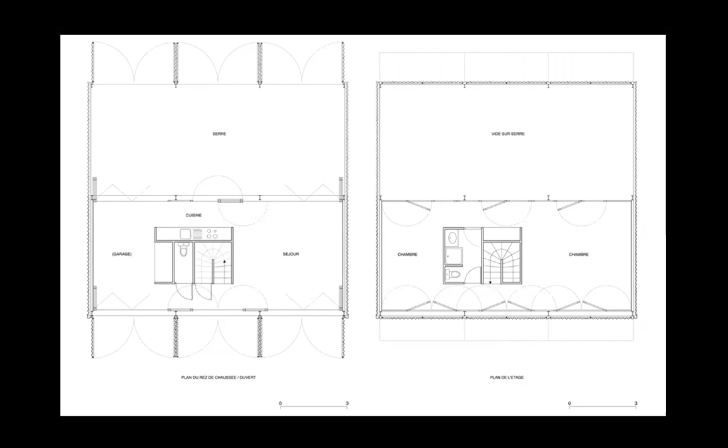In my opinion, and I'm not a functionalist, this is not a house that is very modest, and it's not a house that actually functions very well, in my opinion. Even if I'm sure in France artificial or mechanical ventilation can be provided in decent conditions, but still, anyway, these are some thoughts I had about this house.

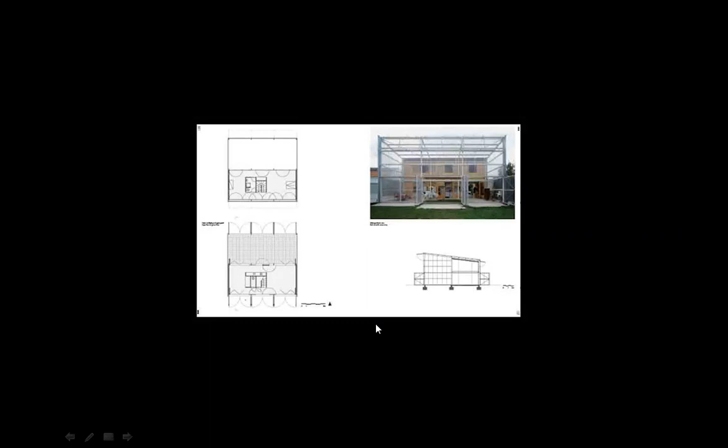Which appears to be modest, but is not actually, because if you look even at this picture on the right corner, that greenhouse is quite rhetorical, quite big. Imagine removing it - then the facade of the building would be here, and the relationship with the exterior would be more natural and, I would say, more beneficial.

On the other hand, if I look at these facades, there is something that I like here - it's almost a lyrical strictness, if I am to use such words. It's modular, and it makes me think a little bit of Japanese architecture. It has qualities, but I don't know.

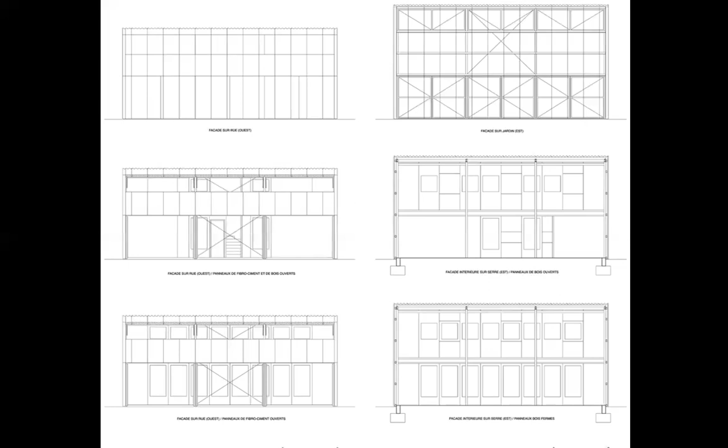Maybe it's necessary to have a direct experience of the place, to live there, and to understand how it is to actually have half of the surface of the house dedicated to being a greenhouse. These X's still bother me, because I'm not sure they are really needed structurally. I think they should be avoided. But this is my opinion.

I'm subjective perhaps, but this X, this crossing - we know very well the symbolism of this X. You cross something out, it means interdiction. That's what it means. And there are plenty of them in this house, but the most bothering one is here.

When I look at this image, I have the clear feeling that this is a cage. And if I am to live in it, it's like I'm a bird in a cage, trapped. To me, this is not freedom. I mean, yes, the doors are widely open, but the X is telling me stay away.

Even though, of course, factually I could go through it, with a little bit of effort. Anyway, thankfully, there is the paraphernalia of what the people who live there have. Things, objects, clothes, and so on, which give life to what otherwise is almost a lifeless architecture. I am tempted to think, like, for example, there is a novel by Musil, A Man Without Qualities.

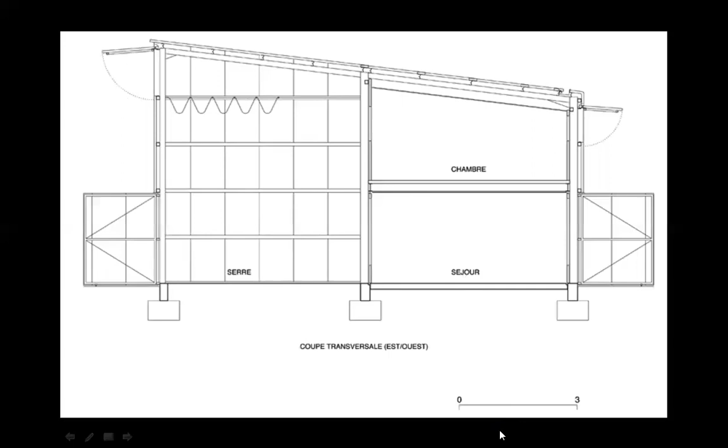I don't know. When I look at this section, of course, a lot of the activities of the living room take place in the greenhouse. It's just that I'm not sure that without air conditioning, or without keeping these doors continuously open, I still think it could be suffocating. But it's true, I'm not a plant. I never lived in a greenhouse.

Now, it's not difficult to imagine without some kind of air conditioning, I think you'd melt down there in the summer because of that extensive glass surface. And it's true, I'm an adversary of the demagogy of glass. I think we should restrain ourselves from using so much glass. Anybody knows, including Philip Johnson, who said that having a glass house like he had increases bills dramatically, and he was very rich—he afforded big bills.

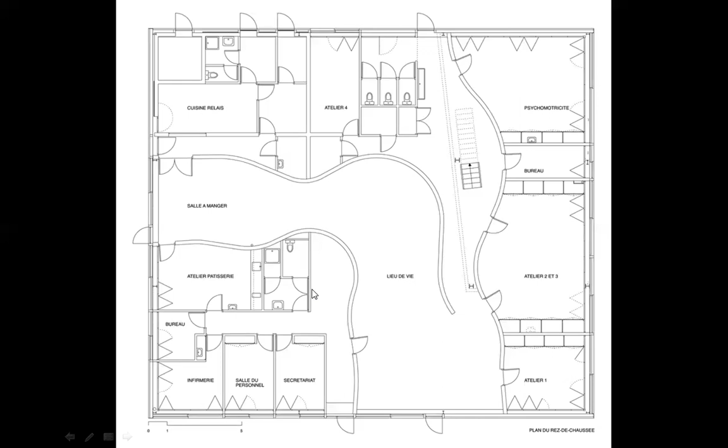So the freedom is contained, it exists to an extent, but not to a very large extent. And we can see even here the walls are very bare. I mean, they are curved, but they are blunt. Nothing happens on these walls.

I don't know, to me this is not a very interesting architecture, I confess. And it's built rather poorly—these materials, you know. That's why it's so needy to bring in some heavy oak furniture or whatever, heavy old antiques. They would add something to the building which the building doesn't have.

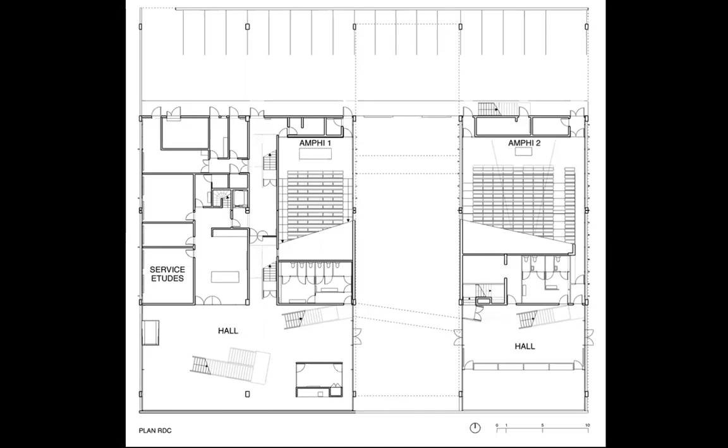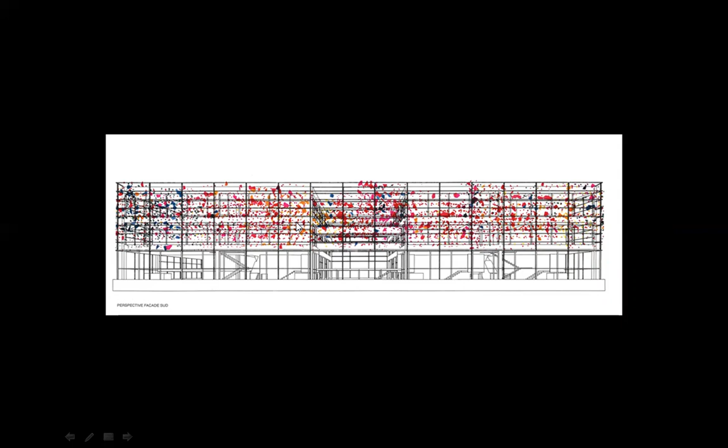It's very regular and unimaginative. And yes, the light is nice in this case, but I don't know. If you look at this building, you would see these impressionistic dots of color, which add some life to a building otherwise kind of lifeless. Maybe with the plants that would happen. But when you think that all of this is glass, and there are actually two layers of glass here, you suffocate.

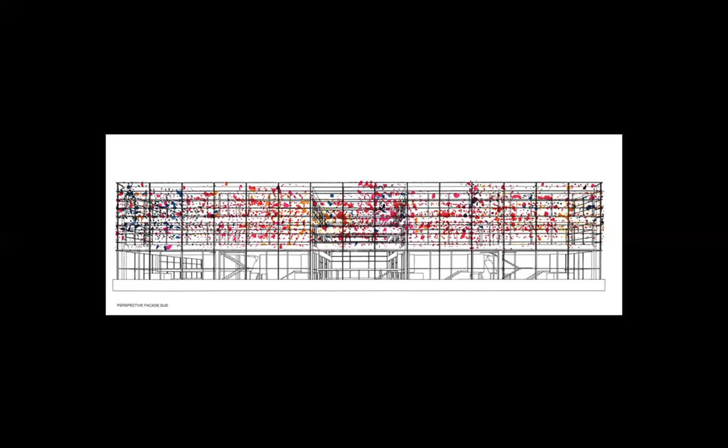That's the truth, Lacaton and Vassal, without air conditioning. And air conditioning means being against your time. When we talk about sustainability, when we talk about climate change, we talk about pollution, to rely on air conditioning is to ignore the serious realities of our time. This is what I believe. On the other hand,

I like these stairs here, how they contradict in a way the Cartesian regularity of the building. That's not bad.

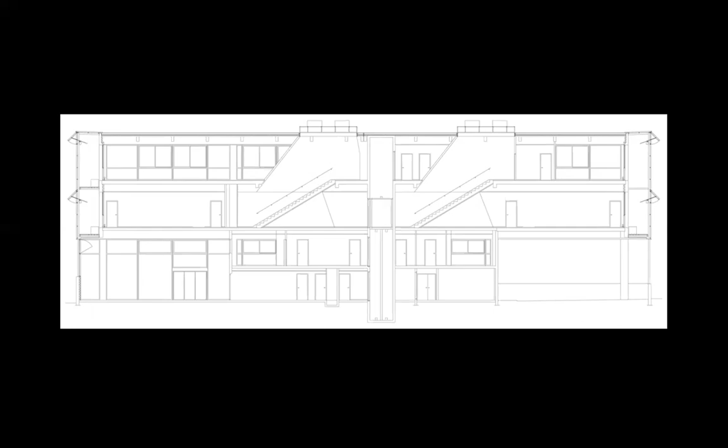But you see clearly in this section what we already discussed, that between the rooms and the outside, there is this intermediate space, which is in essence the glass house where the plants are supposed to be, squeezed in, because that's what it is, squeezed in, entrapped. Well, this is a little better because at least some tables, not everybody. I have an issue with this, I look at this poor student here. He's really losing his sight here, but anyway, let's not be a functionalist.

What bothers me the most is that, again, you cannot live in this space without air conditioning. I don't think you can. And if I was a plant myself, I wouldn't like to be trapped here. No, I wouldn't. I would rather be outside where God made me, not here, trapped between two glass walls by Lacaton and Vassal, and also covered with glass. No, I wouldn't like to be trapped like this, sorry. And if I was a bird, I would not like to be trapped in a cage either.

Maison en Dordogne, 1997. This is it. I mean, they do have qualities, it's a certain essentialism here, which I like. This also makes me think, I don't know, I think this house perhaps would have been more at home in Japan than in Dordogne.

But that's why I keep making references to Ishigami, and not only Ishigami, I like here the archetypal, schematic design. There is something that I like, but again, it's a lot of metal and a lot of grayness. Thankfully, yes, people have furniture. And why is it that people didn't buy furniture that was metallic and gray? Well, I guess because they didn't like it. That's why. It's a big house.

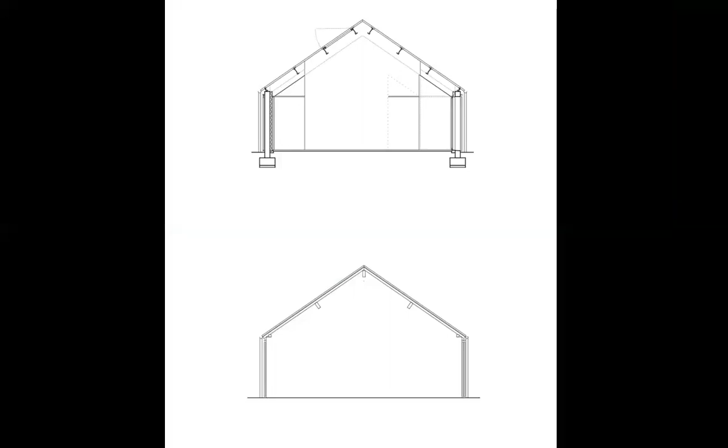It's almost like a warehouse, actually. I have seen other houses like this. This is not just theirs. Just like in the case of the first house we saw, you need an additional roofing here, in this case, an umbrella. But isn't it strange to have an umbrella within a room?

You have to, because, I mean, again, this is not modesty. I'm sorry, this is not modesty. I mean, under this glass roof, you melt down, or even if it's not glass, you melt down in the summer. And in the winter, you better have money to pay the bills for heating this space. But on the other hand, you could say this is a way to bring the outside in, because usually this kind of arrangement takes place in the patio, outside in the courtyard, but not inside the house.

This is something I like. I always liked furniture for the outdoors, but inside. In this case, that's exactly what we got, thanks to Lacaton and Vassal. Yeah. But all in all, grayness is its great majesty in their architecture. Metal, nothing but metal.

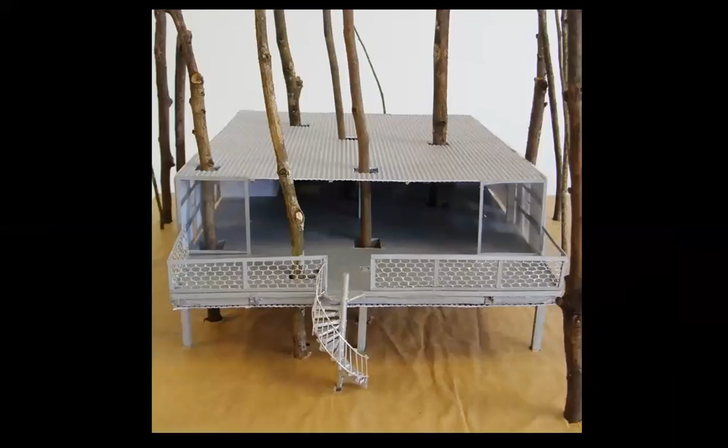I wonder if these are not, to an extent, perversions of an exhausted human being at the beginning of the 21st century or at the end of the 20th century. Look at the model. The house, again, gray, and then the trees. I am tempted to think that if I was a tree, I would not have liked to be treated in this way. No.

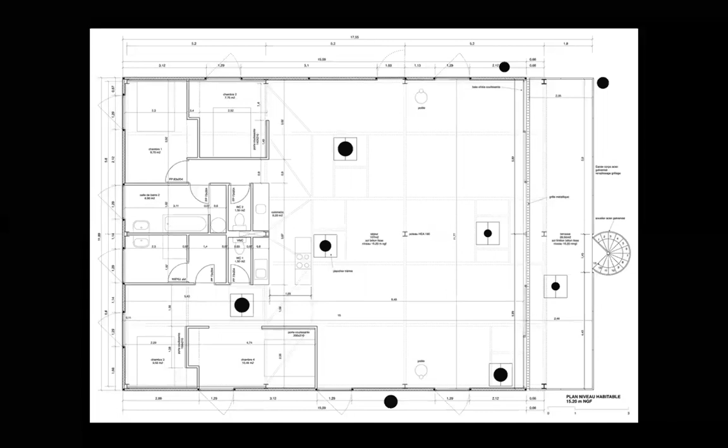Is this the way we make peace with nature? I don't think so. This tree cannot go a little bit to the left or right because it destroys the house. The house is, how do you call it, chaining the tree. The tree is not free like this.

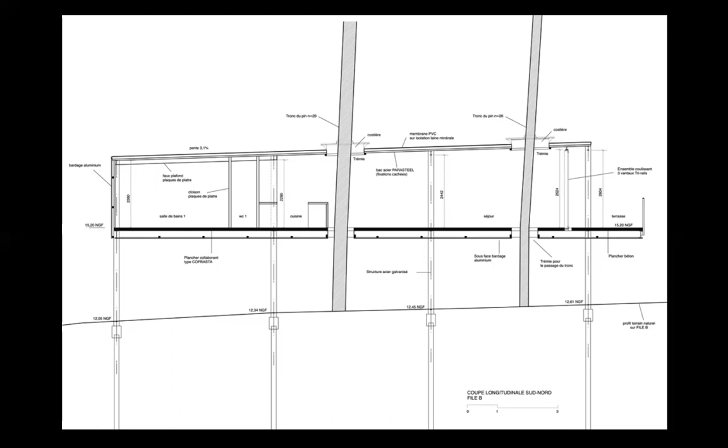In as much as the plants behind two glass walls are not free. Now, if this gives the illusion to these people that they have an intimate connection with the outdoors, that they are inside but also in the forest.

Come on, look at this poor tree here, squeezing itself through this round hole that the architect provided for it. I don't like this. The more I look at it, the more infuriated I get, because it shows lack of sensitivity towards these trees. It's using the trees for some kind of exotic, aesthetical little pleasure.

Maison à Coutras, 2000s, again. What we look at is a glass house. It's a glass house and a greenhouse. If you compare this greenhouse with the glass house that Philip Johnson built for himself, in his case I think it was more honest in a way. This is misleading because this is a greenhouse, and it's a greenhouse for human beings, not for plants.

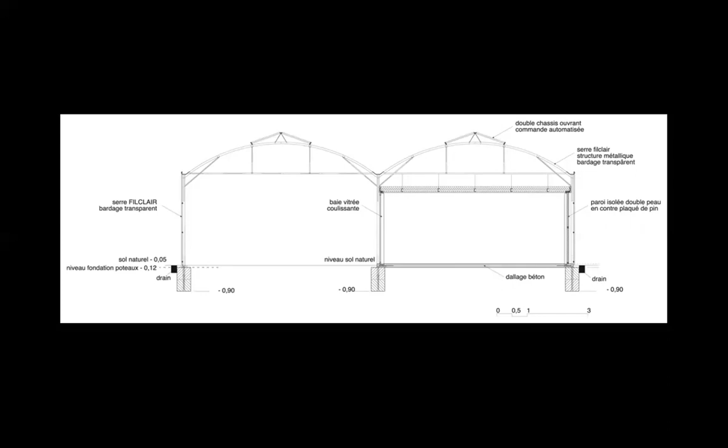At bottom, probably any serious discussion of the work of Lacaton and Vassal comes down to this: is living inside a greenhouse the way to go? When it snows, it's very cold. When it's hot, it's unbearably hot.

Just like in the first house we looked at, the arrangement of spaces here is similar. We have the rectangle of the whole house divided in two. Half of it is a serre, meaning a greenhouse, and the other half is the house per se: the living room, 2 bedrooms, a bureau or study room, kitchen and bathrooms.

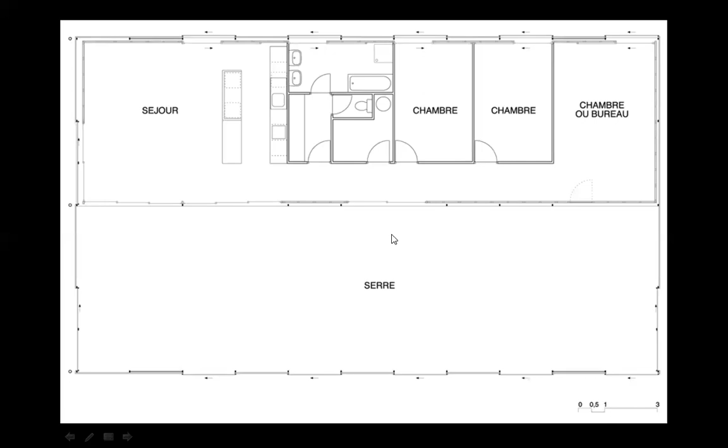I would say the functional arrangement within the house is rather prosaic. This is prosaic architecture. Besides the innovation of cutting the house in two with half dedicated to being a greenhouse, in essence it's not a very imaginative architecture at all.

But the surprise effect is that when people bring in their furniture, you get a lot of variety, especially within the greenhouse. I still wonder how it is here in the winter and how it is here in the hot summer. Yeah, in essence that's what it is, living in a greenhouse, or two greenhouses, like we see here.

Site de création contemporaine dans le Palais de Tokyo à Paris, 2001. I like this very much, I confess, but this is not what they did. This was the existing structure of the building, and I like that they stripped off the finishes. I'm a great adversary of finishes. I like raw materials, raw things, and this is raw.

For this I admire them, because here it shows unconventionality and is really in the spirit of création contemporaine, contemporary creation. Yes, it's still grayness, but here the grayness is more bearable because of the tectonics of the materials we look at. It's heavy grayness.

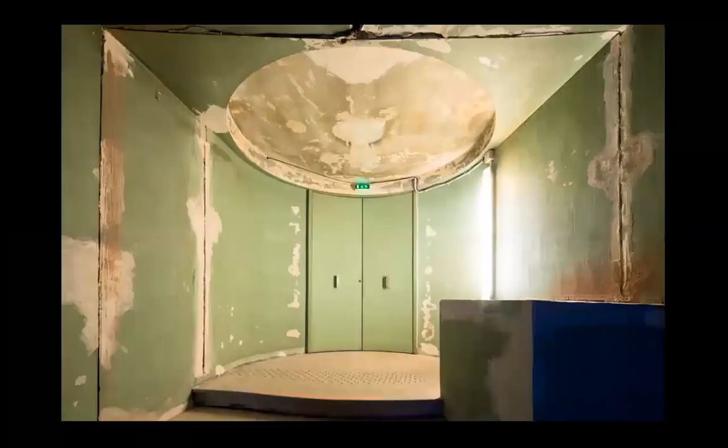This is the building in Paris. It's an important work. I don't know exactly what they did here, and I should have double checked if this building was not built by Auguste Perret. I like even this, the fact that they reject a placid finish, and that they show, in a way, almost the misery of the world.

Yeah, we could talk a little bit about this. Being a space for contemporary art manifestations, I guess it's fine. This is not the opera in Paris, Garnier it is not.

To welcome the ruin is something, I think, to be appreciated. I dislike what I see here. This interior is more spoiled, but it doesn't have really anything inciting. Now, touches of you know, Nipponia, I almost felt like saying. Interior design.

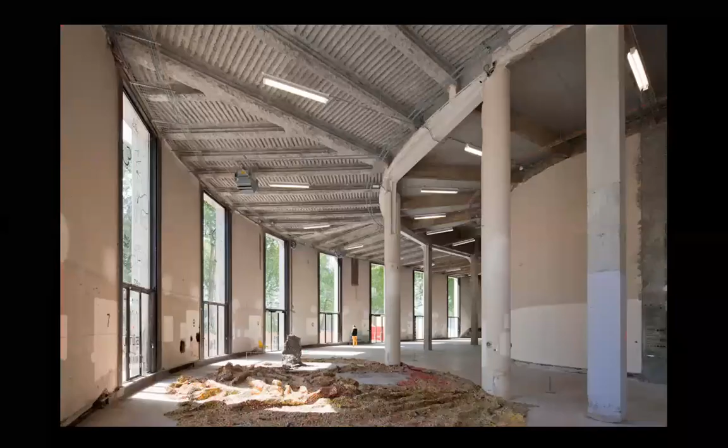Why exactly they chose this kind of ornamentation, which is almost Islamic, in Vienna, I don't know. Vienna does have, of course, a tradition of the ornament, even if Vienna is also the place where Adolf Loos wrote Ornament and Crime, or Crime and Ornament. I always have them. I still don't know exactly if crime came first or ornament came first.

Anyway, Lacaton and Vassal, who didn't show any kind of interest in ornamentation before, all of a sudden go against Adolf Loos and create this surreally ornamental ceiling, and I'm happy they did. I'm actually surprised, because I was a few times in this building, but I don't remember. I never went to the cafe. That's why I didn't see this ceiling at the Architekturzentrum in Vienna.

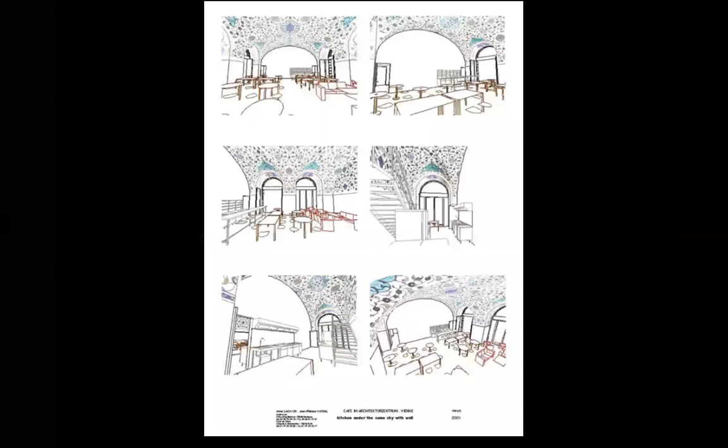So there are signs of hope here, actually, that the great knights of grayness were also capable of surprising us and themselves with such a work. I think this has to be applauded, that they were able to do something like this in a different city, and it shows that they can be open-minded and that they are not dogmatic.

This is good. But again, I'm not sure about the nature of the ornamentation. I'm not sure it's exactly the Viennese spirit, but I still appreciate it. I like it. So Lacaton and Vassal in Vienna, in Vienne.

Thank God they got rid of the eternal grayness here. All of a sudden I can breathe now. Bureau, Nantes, offices in Nantes, 2001. Glass, glass, and glass again. Without glass, we cannot be.

It seems I'm so tired of this glass, really. Again, a lot of glass, a lot of air conditioning. It's as simple as this, or as complicated as this, because it's not inexpensive to use a lot of air conditioning, and it is a source of pollution. We should think seriously about this these days, these years.

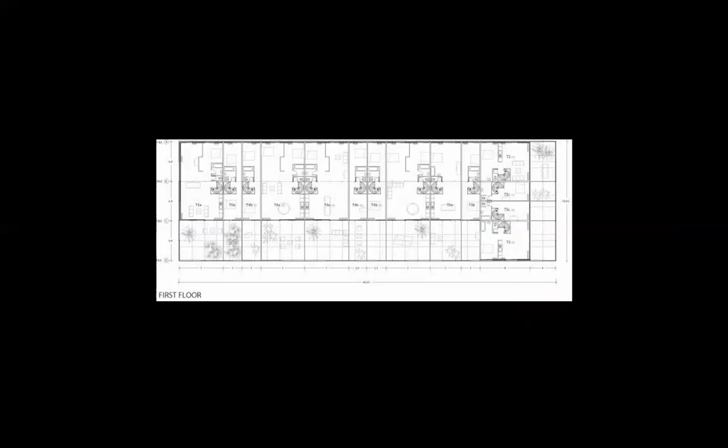That's what it is. That intermezzo in Vienna was really the exception that confirms the rule. And again, the same kind of distribution of spaces. We have the apartments, and then we have la serre, we have the greenhouse.

They do it all the time. They probably love this, and of course the greenhouse is here. Almost all their works are based on this paradigm. We have seen this, it's nothing new.

I really wonder, how is the quality of the air there? How is it? I'm tempted to think it's not great. Maybe I'm wrong.

Maison Keremma, 2005. The same thing, like we have seen, but here there are some interesting things. There are 3 houses. To me, what I look at here is this is very Japanese somehow.

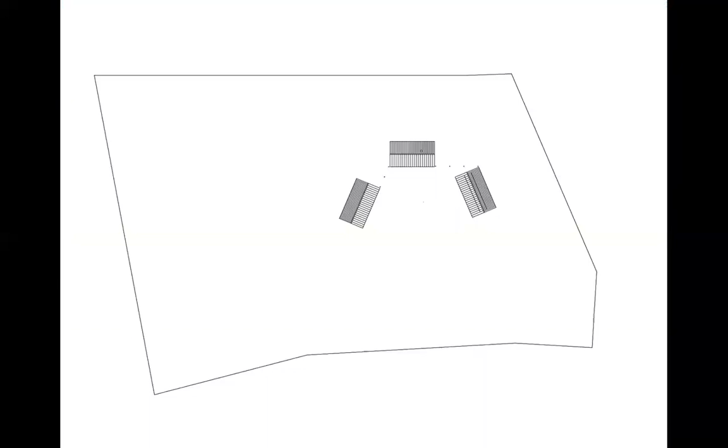Here they are, the 3 houses. They have a greenhouse here as well.

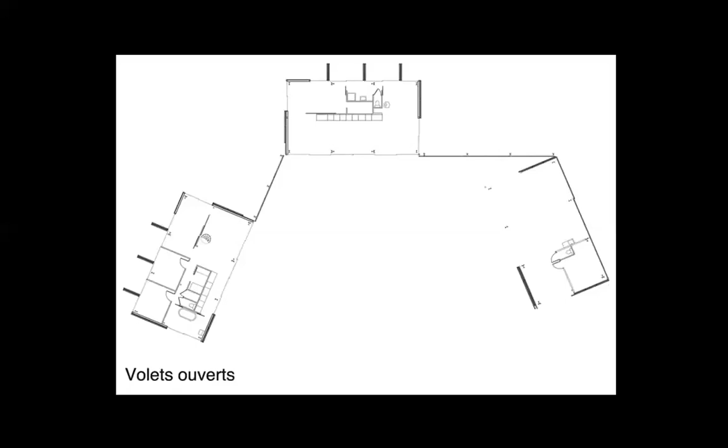But you know, these kind of openings in the wall made me think of stables, for horses or something.

I don't know, anyway. Pôle universitaire de sciences de gestion, Bordeaux, 2006. Glass, glass, and glass again. Too much glass, in my opinion. Much too much glass, and too much grayness, and too much metal.

I don't think they ever did a building using stones or bricks, no. I mean, look here — you suffocate here in the summer. It's... anyway.

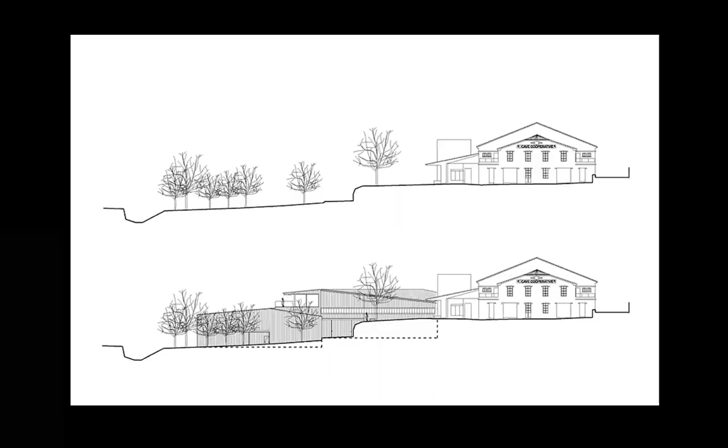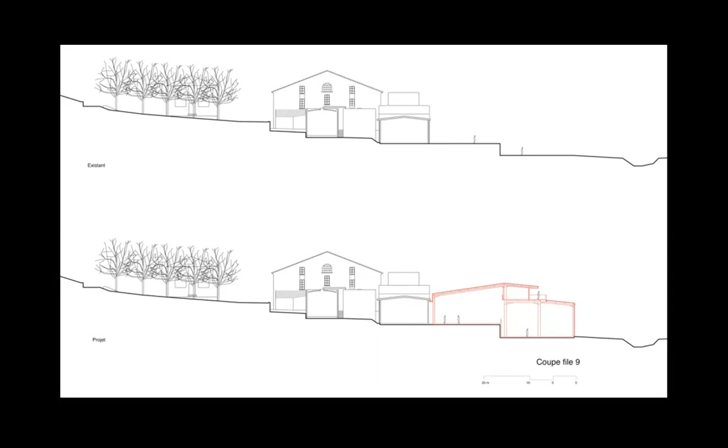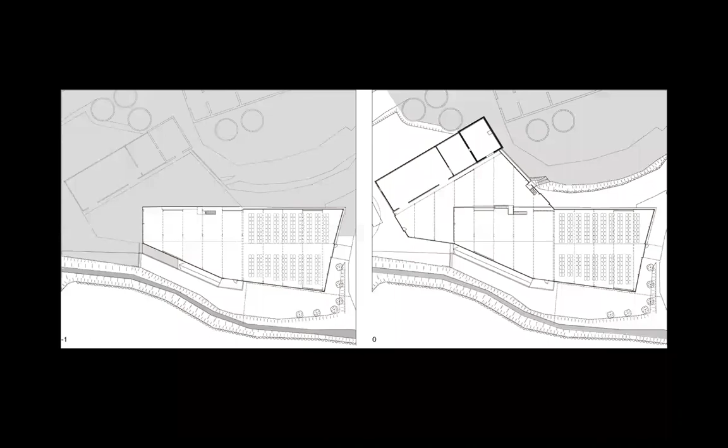Halle Exposition, an exhibition space, quite large. Of course, you can place some small aircraft there. Again, without air conditioning, these buildings would not function. I'm sorry. If the French have the money to squander on the electric bills, let them do it. But in my opinion, it's clearly not a sustainable architecture, and it's not an architect.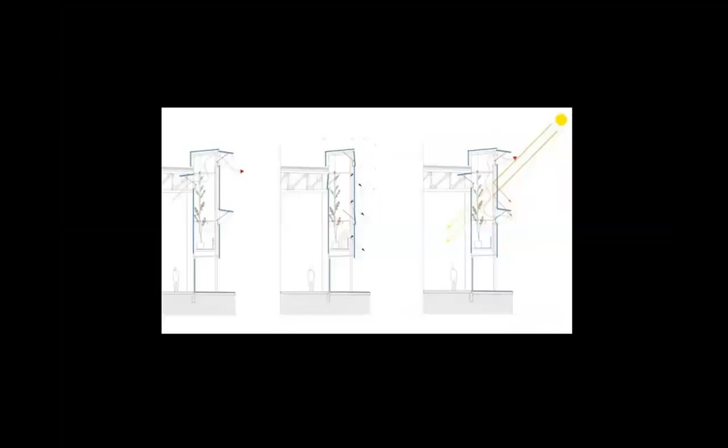Look at these sketches. Oh yes, the sun is now reaching the plant, and the plant is so happy to be trapped inside its cage here. I don't think the plant is happy. No, I don't think so. If I was a plant, I would hate to be crucified here inside this space, entrapped, the prisoner of this space of Lacaton and Vassal. I would hate it. It's also narrow.

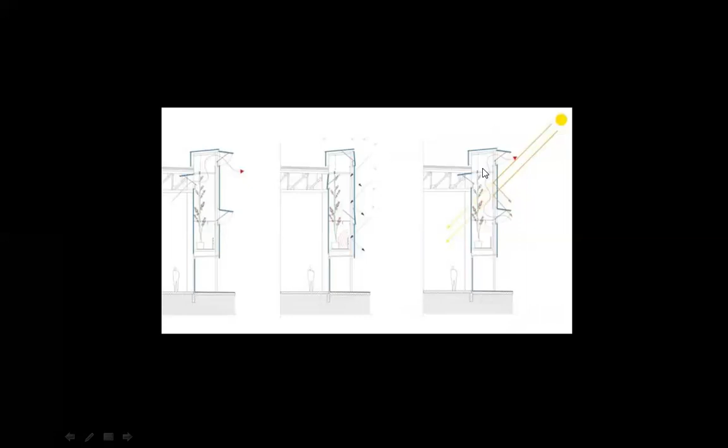And I'm really, they didn't realize that this is trapping the plants. They are trapping the plants, that's what they do. But they are also trapping the human beings behind this wall in a different way. École d'Architecture de Nantes, this is the School of Architecture in Nantes, 2009.

But that's just a fragment of the building. Otherwise, glass, and glass again. I don't know, is there a big difference between L'École d'Architecture, the School of Architecture, and that industrial space for the production of wine that we just saw? I don't think it's such a great difference, really, as if the functions are very similar, the industrial production of wine, and the teaching of architecture. Isn't it strange? The architectures are almost similar.

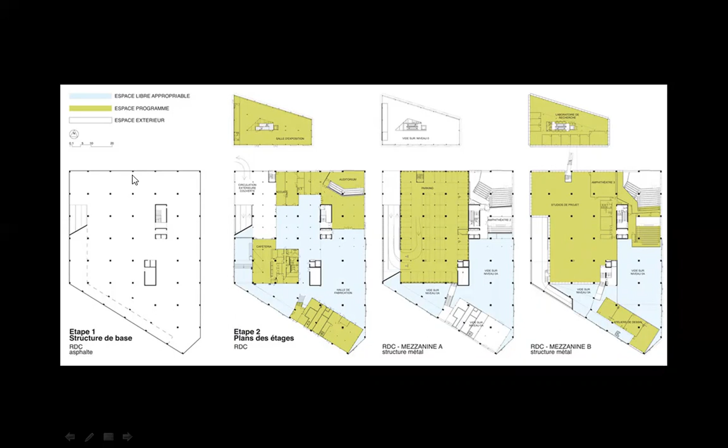I mean, these are huge spaces. Imagine you are here, maybe this is 6 meters, so you are 18 meters away from the exterior of the building. If you are here in the center, 18 meters, that's a long distance, you are far away from light and from the exterior and from natural light.

If this was for the production of wine, I would not have been surprised, but it's not for the production of wine. Imagine you are here, right? Somewhere here or here. Where are the windows? Far away on both sides, very far away.

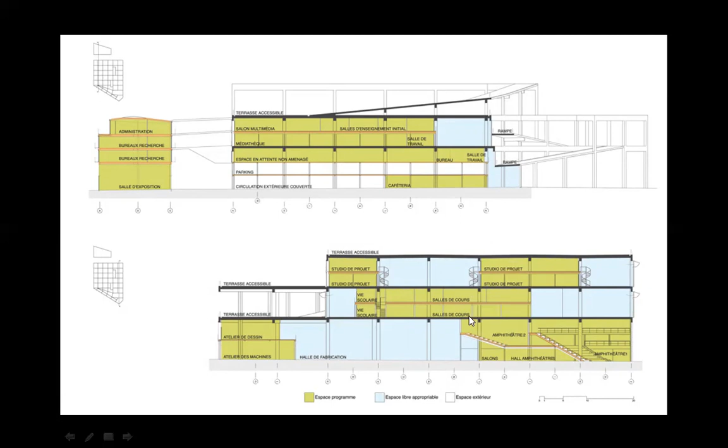This is dark, and you need electrical light, artificial light, and so on. And anyway, welcome to modernity. Transformation de la Tour Bois le Prêtre in Paris, 2009, they got a prize, L'Équerre d'Argent, in 2011.

That glass in the winter brings the cold in. That glass in the summer brings a terrible hotness in. Didn't they know this? I think they knew, but they ignored it, because at that time, 10 years ago, maybe people thought that pollution does not exist or is not important, and the funds of France are not limited thanks to cultural tourism, so they can pay for the air conditioners.

Really, I think a revolt has to take place against glass. We have to fight against glass.

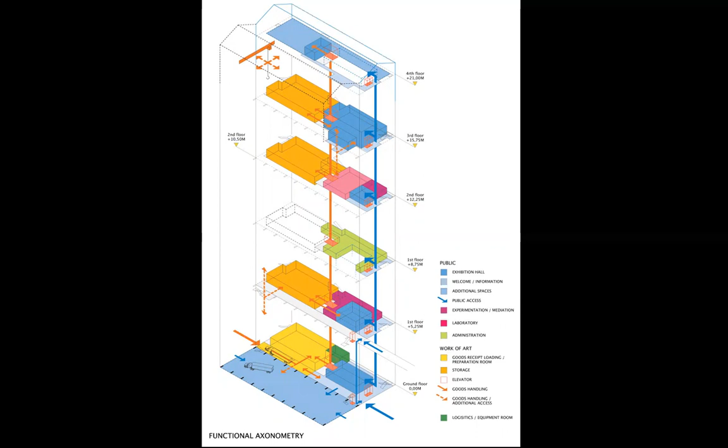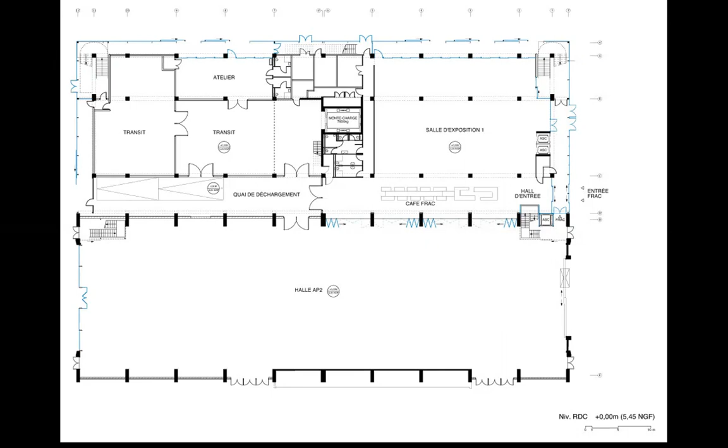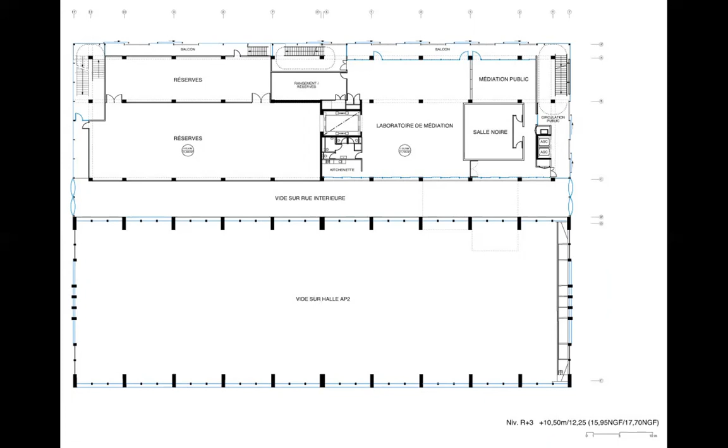Again, the division of the plan into two parts: one part with many functions, and then a part which in this case is not a serre or greenhouse, but again we have this duality. It happens that I like dualities. In general, I myself have lots of dualities. But this is actually very obvious in their works. So here we have two different spaces separated by this rue intérieure, the interior street within the buildings.

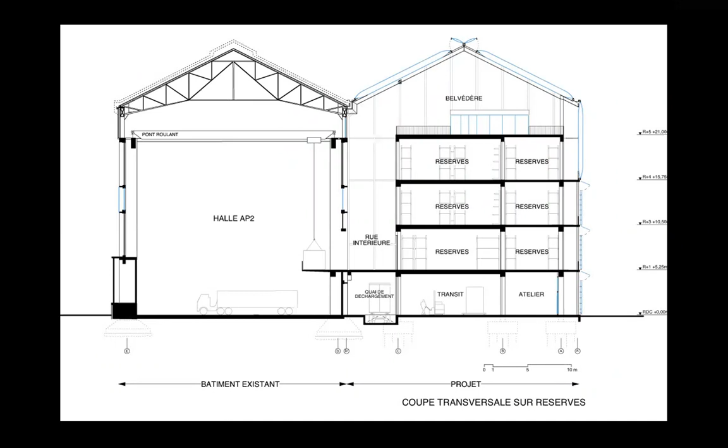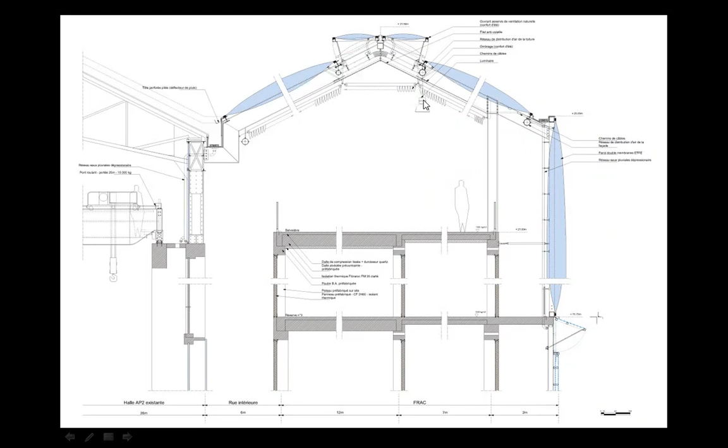Well, the so-called intimate connection with the above, with the sky, with light and so on, requires a very carefully orchestrated technology, as we can see here. So there is a price to pay for freedom. Le Grand Sud, salle de spectacle polyvalente, Lille, 2013.

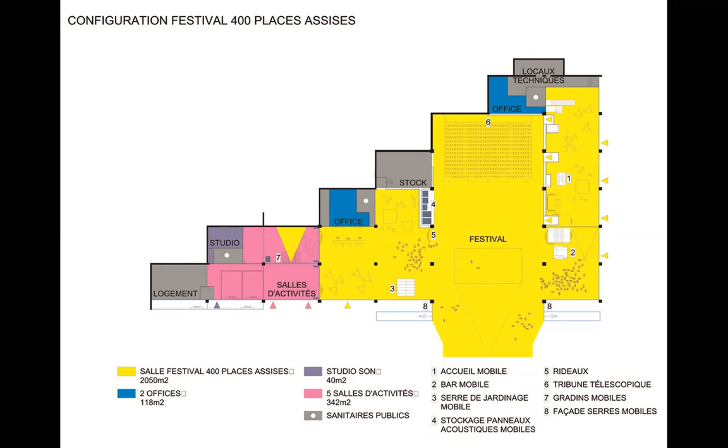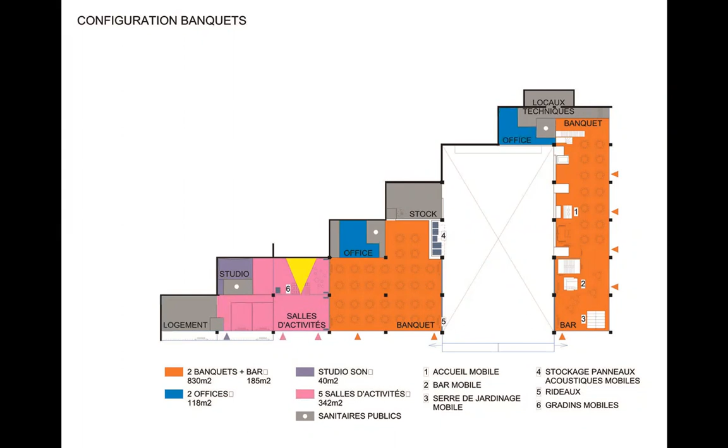Anyway, it's a spectacle—a salle polyvalente. And the building is very gray, but look at the diagrams: colors everywhere. I wonder if they didn't smile or feel the irony. The drawings are colorful, but the building is totally gray. Well, good that at least in the drawings they felt the need for color.

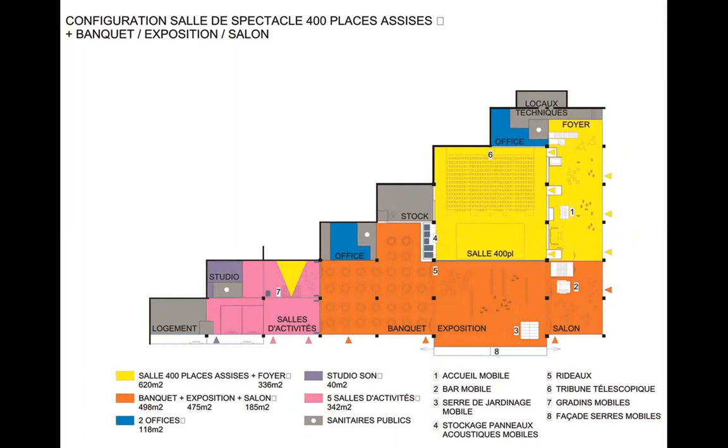Not in the section though. Kind of depressing, this section, if you ask me.

Okay, now we go to Quartier du Grand Parc, régénération de trois tours vouées à la démolition. This became famous for transforming old social housing by refurbishing it. This is in Bordeaux from 2016. But here, maybe there's a little devil in me, maybe not so little. This is the old building, the one they wanted to demolish. Why? I'm not sure, because to me it's not really a building one should demolish. But we'll see how they transform this building according to the plans of Lacaton and Vassal.

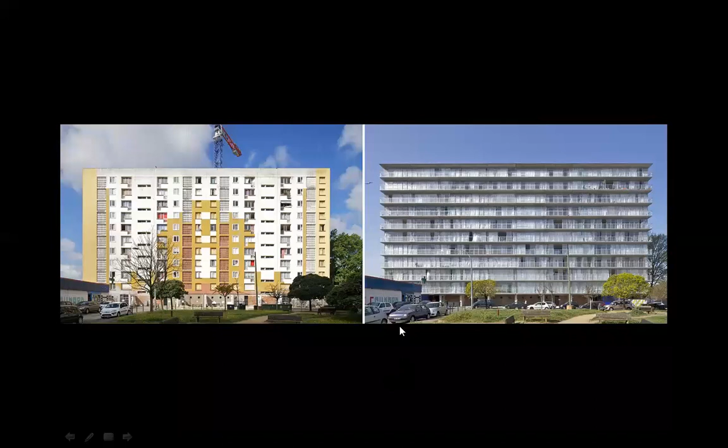If I look at these two things, what if we think the other way? This was the old building, supposed to be demolished, and some architects transformed it into this. Maybe my thinking is distorted by heat or whatever, but I don't really think this is immense progress from that. I'm sorry, and it was done with a lot of expenditure, and you'll understand why. Again, welcome to Lacaton and Vassal.

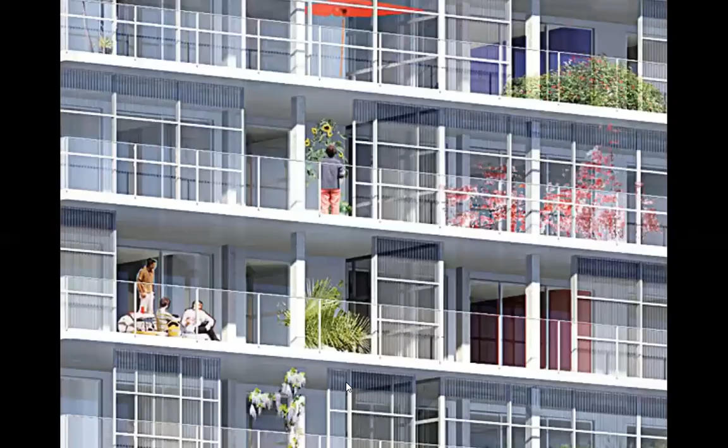Certain things don't change. The people are behind this, and this space is for whatever. So there are two screens that separate the building. The initial facade of the building was here. They added this, you'll understand how. Glass, glass, and glass again. Look how they did it, they planted, they added this thing to the facade of the old building.

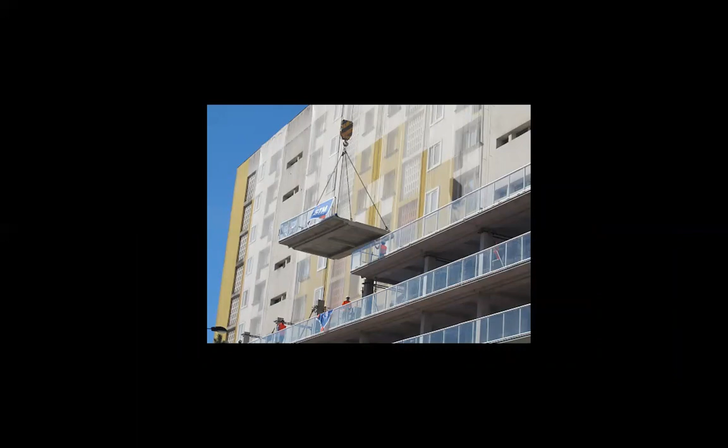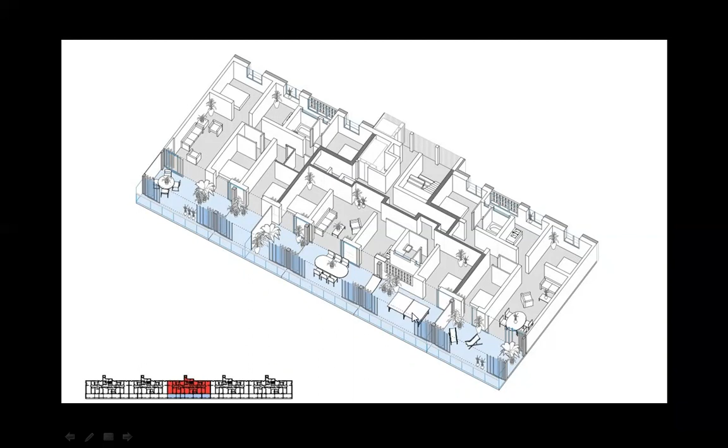So you understand, the facade of the existing building was here, and they added this layer in front of it. They managed to bring back — well, it's not a greenhouse, but that additional space — which of course distances the rooms from the exterior, but this space could be interesting, because you could even put a ping pong table here, I guess.

Otherwise, welcome to the gray Pritzker. Gray, grayer than the clouds. But as opposed to the clouds, the lines of this gray architecture are straight and have no hesitations. They don't want to become curved or capriciously curved. No.

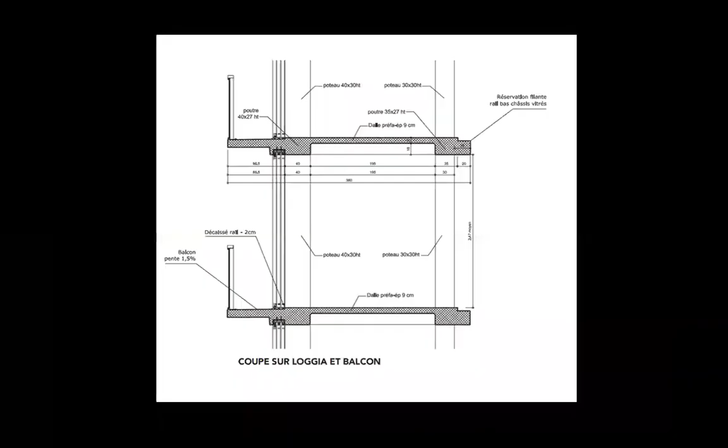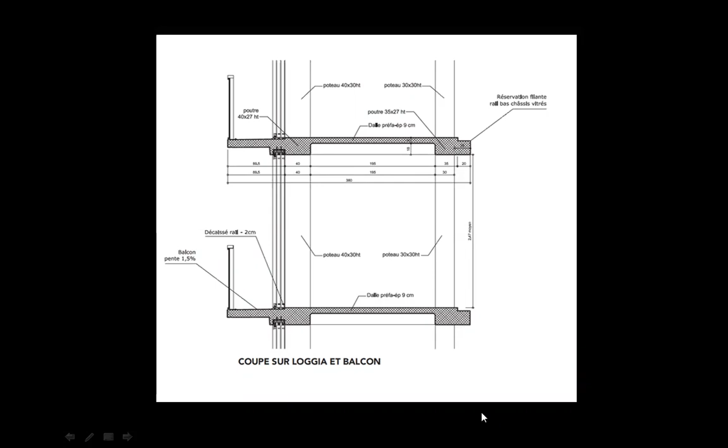Now imagine bringing this loggia and the balcony — I don't see the dimension here, but it's not a little thing. It was an effort, financial and maybe engineering or structural as well. Anyway, it was done. Was it a great improvement? I let you decide.

So what they did was remove the existing facade of the building and bring in the grayish addition. This is 3 meters wide — not so little. 1 meter for the balcony and the jardin d'hiver, which in the summer becomes something else, the melting pot of the summer. 2 meters wide. They love those, what can we do, they just love those. They love greenhouses.

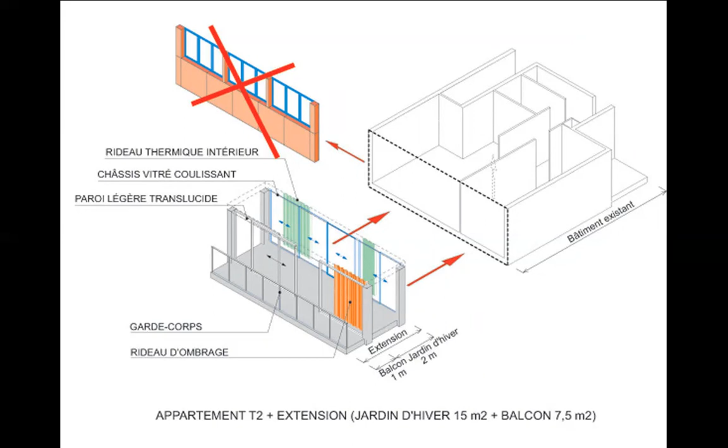That's it. So happy birthday, Anne Lacaton. And let's see who is here.